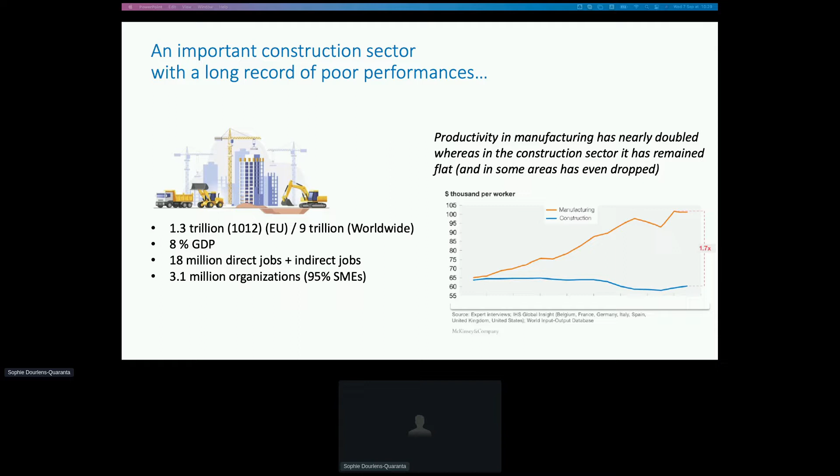For instance, the McKinsey report states that in the last decade, productivity in manufacturing has nearly doubled, whereas in the construction sector it remained the same, and in some areas even dropped, which is a big problem, right?

But it's not only about productivity. I'm going to stand up, much more comfortable. So, but it's not only about productivity, right?

If you consider that the built environment is the space where people live, recreate, and work, it means it strongly affects environmental, economic, and strategic development as a whole. Therefore, it needs to be healthy, comfortable, safe, sustainable, and so on, which is a big challenge.

Another big challenge is, of course, renovation. Renovation is a major challenge because the stock of existing buildings is huge—something like 75% of the existing building stock.

This stock is basically non-efficient on the energy level, because it was built in a period where there were no energy performance requirements, right? So we have this huge stock.

The rate of renovation of the stock is very low. If you consider that we need deep renovation to improve energy efficiency by, let's say, 60% or so, we only have 0.2% of the stock renovated each year, which is very, very low.

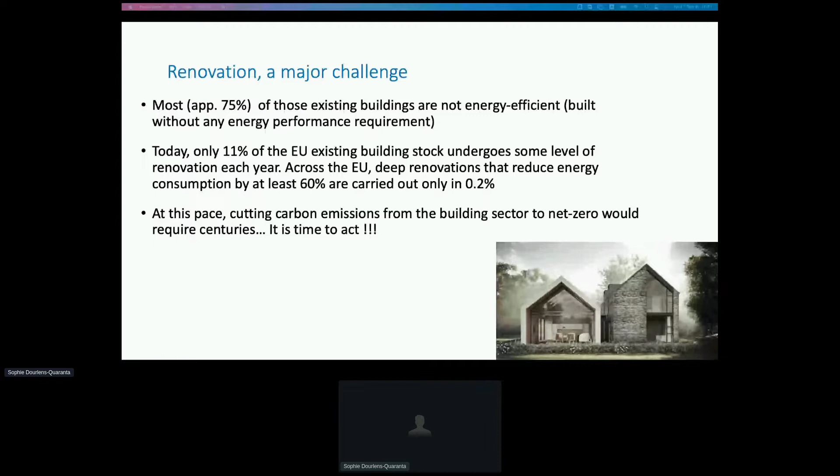This is basically what the EU is doing through the Renovation Wave strategy. This strategy was launched by the European Commission. It aims at doubling the rate of renovations and modernizing the existing stock, and also at contributing to the green and digital transition in Europe.

There are 3 actions mentioned in this strategy that you will obviously be interested in: digital building logbooks, building permits, and also BIM for public procurement. I will go back to these items as I go.

In that context, the EU BIM Task Group addresses some of these issues. So what is this group? It is a European platform composed of public procurers and policymakers, aiming to bring collective expertise to improve BIM deployment in European countries. This is a major issue for us.

I chose here a photo with Richard Petrie, late Richard Petrie, a member of the group, as a tribute to my friend Richard, who passed away a few months ago.

Obviously, we want to share common best practices between European countries. Some countries are more advanced than others, so how do we share these best practices? How do we make it possible for European countries to improve their BIM journey? A major point is that we need to bridge the gap between the demand side on one hand and the supply side on the other.

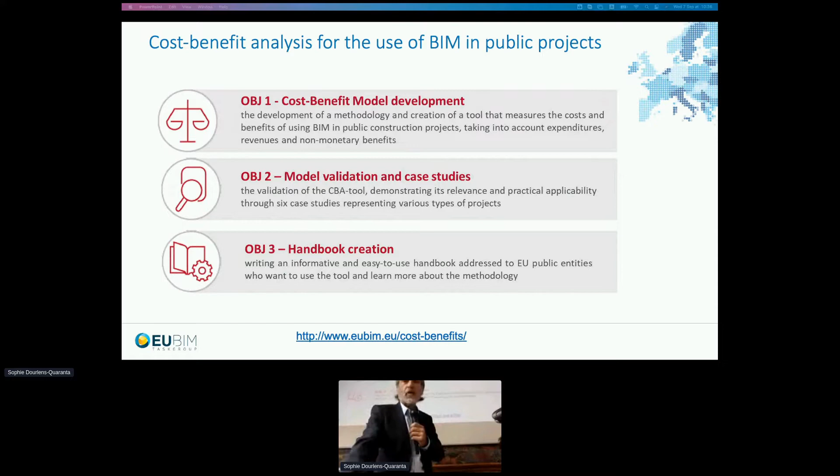The case studies we used to validate the model are very different, obviously, because we needed to make sure we cover the whole spectrum. We have case studies coming from various countries in Europe. We have projects of buildings, projects of infrastructures. We have various types of budget, important budget, but also small budgets. And obviously we cover all the phases - design, but also renovation. So it covers all these activities.

Again, all this material is also available on the website, so please go ahead and check it.

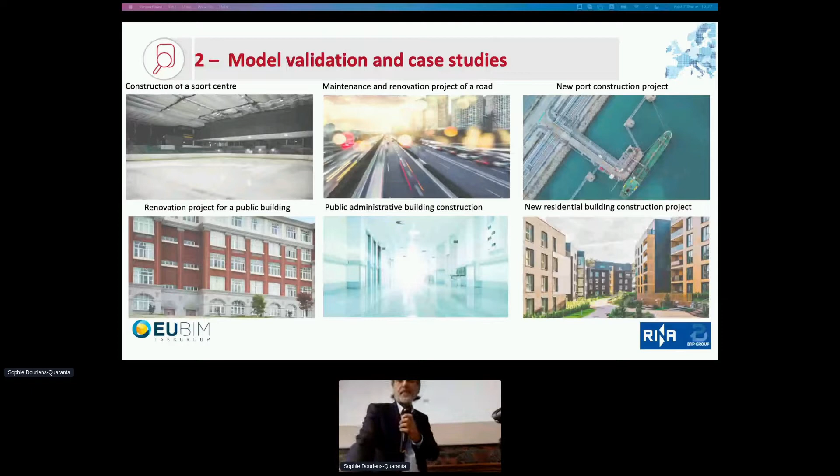And the action we finally worked on is a white paper that we prepared for the European Commission. You probably know the European Commission has a public procurement directive that was published in 2014. This directive was not very ambitious on the BIM level. It only said that procurers are encouraged, or the use of BIM for public procurement is suggested.

So the European Commission is now working on a new directive, and we are pushing for the new directive to be more ambitious on the BIM level, and we are providing the European Commission with some information to back this argument. In the white paper, we underline the importance of

using public money and making sure that you can use public money in the right sense. And to do so, we underline the importance of using open standards, because open standards allow, in fact, to make sure that public procurers are not stuck with one vendor or one solution.

So finally, I just want to draw your attention to the work going on at the high-level construction forum. It is, I think, a very interesting forum that aims to initiate the cooperation process of transition pathway between green, digital, and resilient transitions. This is done under the invitation coming from the EU Commission. About more than 200 representatives are attending these forums from different countries, coming from the private sector, the public sector, and all kinds of stakeholders, with very different sessions organized.

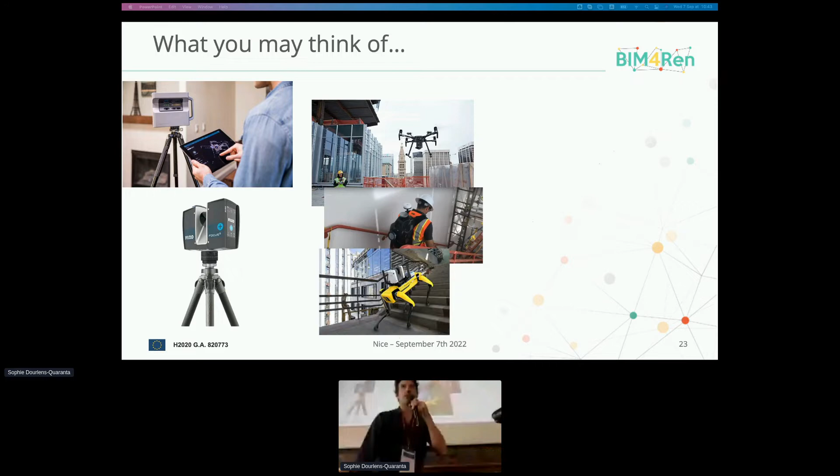When we speak about digitalization, what you may think of initially, or if you go to Google and search for digitalizing existing buildings, what you will probably find first is this kind of thing: laser scanners and LiDARs, and these kinds of cameras where you can collect a lot of data in an existing building. Technologies are evolving, we have different shapes now for these technologies. Drones are now used to collect information on the envelope of the building. You can see also some people with some bags who travel through the building collecting data with these kinds of devices as well. And now we also have robots that can be used to do so. This is really nice, and it's like wow, high tech, right?

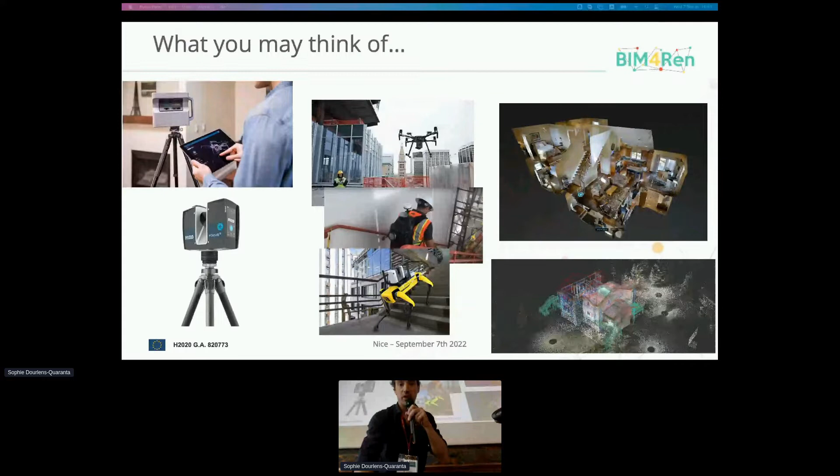And what does this produce? Once you've collected the data, you have some massive files that you need to process - you have hundreds of pictures of one flat, and you can recreate the environment, or you can have point clouds, millions of points representing the geometrical building and its different parts and so on. Okay, so you've done that, you're happy, you've used the laser technology, but now what can you do with that? So you have a renovation project, and what can you do with this data?

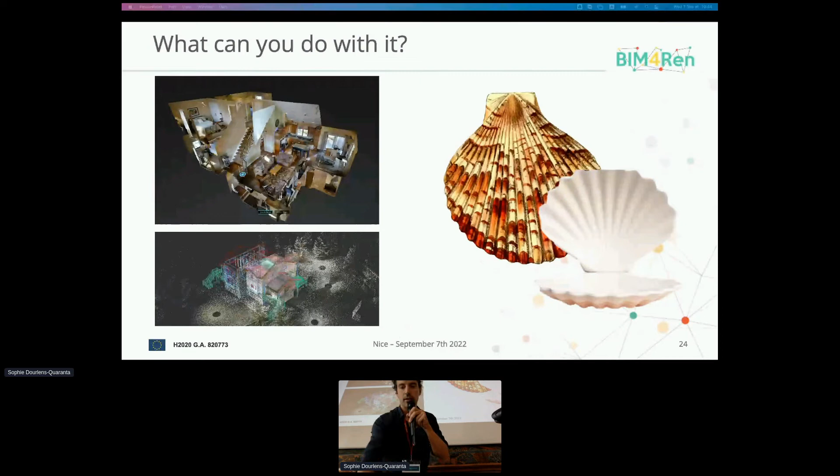In my opinion, and that's the approach we took in the different projects, this is nice, but it's empty, right? It's like an empty shell. You have a lot of data, but you cannot do much with that. Perhaps this kind of data is more useful for your renovation project - perhaps an Excel file with a quantity takeoff of your building. This is more useful to people who need to install new equipment in your building, because they have the exact quantities and so on. They don't have to look at the point clouds and so on. So perhaps this is really much more useful.

Or if you want to have some information about the status of your building, an energy audit is more useful. So the idea is that when you start with digitalization and BIM, you really have to look at your needs. And BIM is not 3D.

I think it's now more well known that you need to attach more importance to the data that you want to be part of your model. Yeah, the value of BIM is in the data. And so our approach is that BIM is methodologies, not just digital tools.

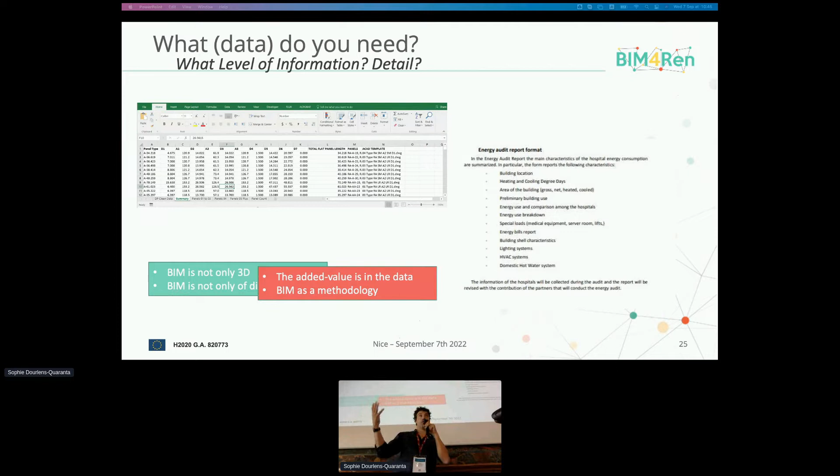Part of this methodology is also to try to identify exactly what are your needs and what kind of model you want to build up for your renovation project. So let's start to draw a workflow for a typical energy renovation project.

As a first step, we want to define the data that we need. In this kind of scenario, we know more or less what we want to change in the building. We know that it's about ventilation, about HVAC systems, the openings, and that's what we want to modify in an existing building.

So what do we want to do when we start our goals for this renovation project? We want to guarantee the energy performance of the renovation. So we need to be strong at that, to ensure customers about the energy reduction that we can ensure to him.

What is perhaps even more important to him is the cost of the renovation. This is crucial, of course. If you want to go further, you can potentially also import on the carbon impact and estimate the reusability of some materials that you will remove in the building during the renovation, and so on.

So you can have different actions that you want to perform in the renovation project, or different goals that you want to reach. How will we do that?

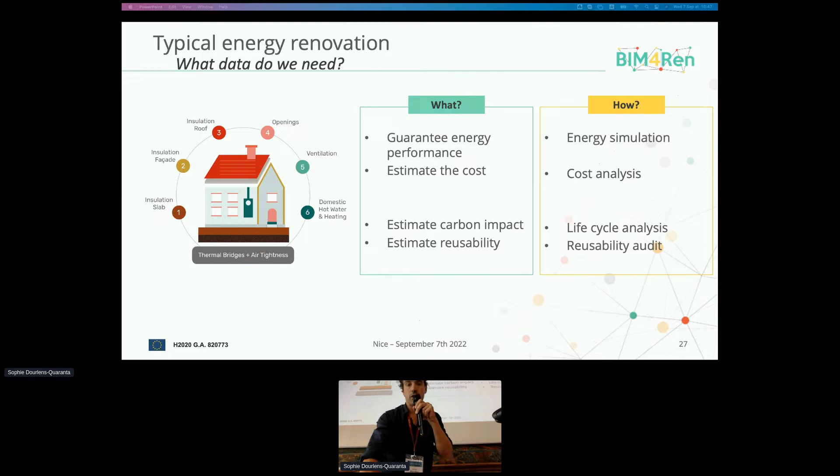Once you have answered those questions of what are the data that you need or that you will generate during this process - for the energy simulation, you need some data on the envelope, data like the thickness of the insulation, the kind of material, resistance that is embedded, the type of glazing on the building.

So you can list all the information on cost - the cost of the materials, the bill of quantities, the cost of manpower, incentives, the return on investment, and so on. So you can list all the data that you will need to perform the different actions, the different goals that you have in your project.

Once you've listed all this data, what you need to do is map it into a schema, to know exactly where you will put all this data in your model - or perhaps, will you put all this data in your model? Manpower, cost of manpower - I don't know if that will be part of your model, but you will need that at some point.

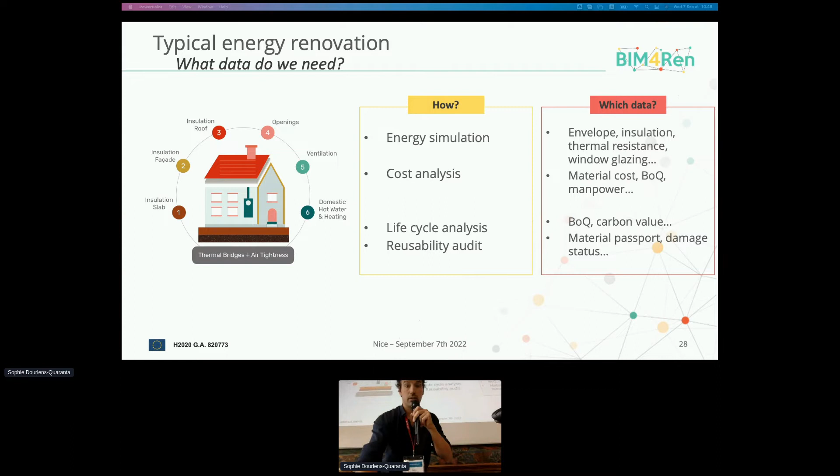So we need to transform all of this data into some BIM data as much as possible. Then the second step, once you have identified all the data that you need, is to pick up, to choose the right tools that you need to create your model.

So if you need the geometry, for instance, we've seen already that you can use some laser scanning. But if you want to create your 3D model out of it, it can take quite some time, because you need to clean up the point clouds and rebuild the 3D BIM geometry.

It's really quick. You can also use some GIS data. This would be important to get an idea of the different shadowing that the building will have, impacting its energy performance.

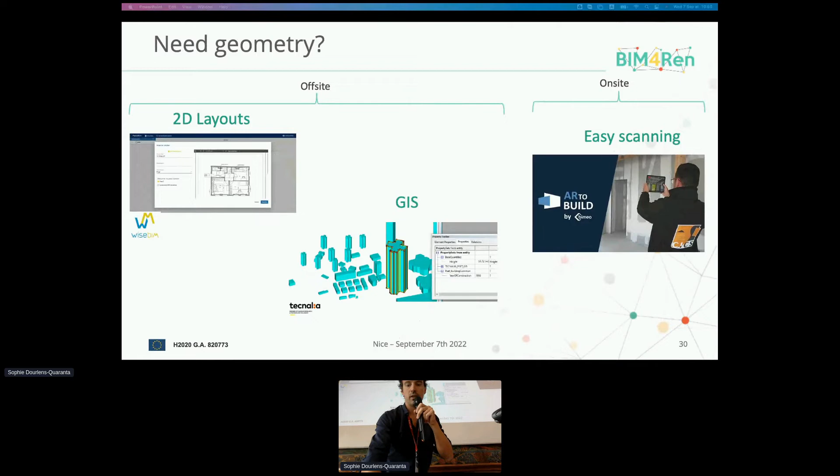And still, if you need to go on site, perhaps you don't need to have this big laser scanner. Nowadays, you have like iPads or other mobile devices with a LiDAR camera, and different apps are being developed using these cameras to do some fast scanning with your day-to-day smart device.

So we have created initial geometry, and then we need to fill that geometry with technical information. If we consider an existing building, we have two versions, on-site and off-site. Off-site, if you have technical documents about elements already installed in your building, you can scan those documents and extract the technical information. If you don't have those, you can use a smartphone, go on-site, perform the audit, and take reference of the different products installed, damages, etc. Then go back to the office, take the technical information, and put it into your BIM model.

So now you create your BIM model for this building, and for typical renovation, what you want to do is estimate different renovation scenarios. What's been done is a platform where you can click on the different items you want to change in a renovation, perhaps the windows, and connect to a catalog of products, and import all the technical information into your new model, creating a new model for the building to be renovated. Then you can estimate energy performance with energy simulation and so on.

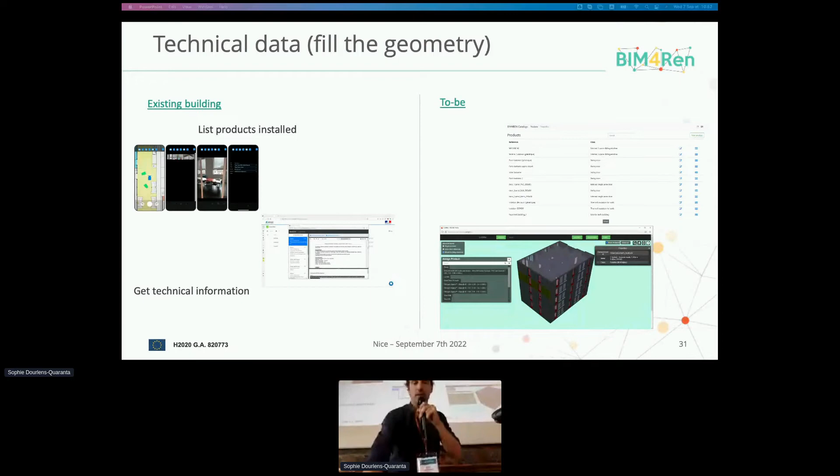I'm not entering those details, as I'm focusing on the digitalization part. So, my conclusions on this topic of digitalization.

For the users, it's really important to identify the needs for every project they're working on. Perhaps every project is different, so every model you create is different, but you need to correctly identify the data that's useful for you in your project. Then you need to choose wisely, because if you create big models with a lot of data and you don't need like 90% of it, the model becomes chaotic, hard to open, hard to work with—you're missing the point. I believe there are a lot of tools being developed, so the selection of tools isn't that easy. You need a correct state of the art of the different systems.

For the developers, it's important to listen to client needs, because sometimes we're in some high-tech process and we want to build nice software that does many things, but what clients and customers need in general is something really simple. So create software that's simple to use, perhaps performing something really specific, like the 2D to 3D recreation we saw before. That's what customers want and need. And then ensure interoperability with other software that does other specific things.

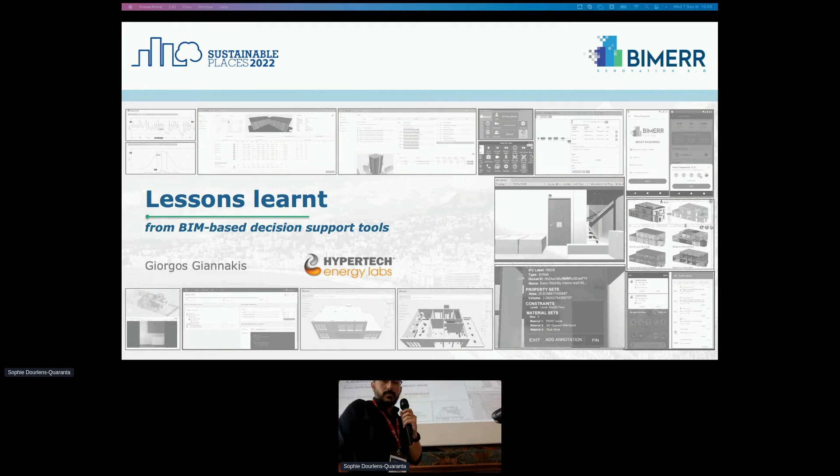But what are the lessons learned from the implementation and demonstration of such tools in actual, real-life renovation projects? The lessons learned vary—there are many, and I could not cover all of them in a 10-minute presentation. What I'd like to do in the next 8 minutes is provide some highlights about specific tools involved in the 3 different phases of a renovation project.

Lessons learned highlights with regards to tools demonstrated in those phases, starting with the data collection process, and the collection of static data, referring to BIM model population and generation. Tools involved here are scan-to-BIM, to semi-automate the process of transforming point cloud data acquired by laser scanners into BIM files, where our focus is on open BIM files, and more specifically on IFC.

Then how do we enhance and enrich the result of scan-to-BIM, the automated scan-to-BIM process, with augmented reality, using the BIM as input, trying to enrich this geometry with, for example, material properties, HVAC systems, and other information. But more importantly, how we manage this information. We create a BIM model, but at the end we need to know how we manage this information, how we access it, how we make it available to others. For this specific task, I'm referring to building information modeling data management platforms.

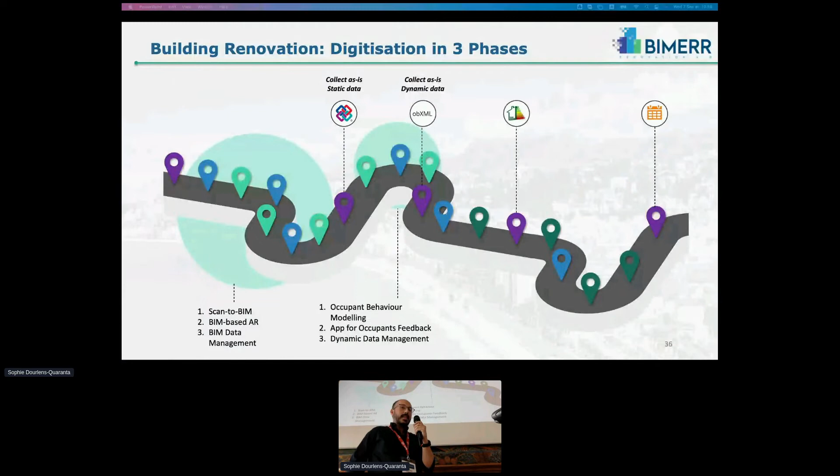Going beyond the static data, but again in the data collection phase of a renovation project, let's talk a bit about the dynamic data. I'm referring to all the scheduling information required, the profile information of the usage of systems, that is required to run simulations and reduce the gap between simulated and measured building performance.

Here, tools that are involved are machine learning algorithms applied on IoT data collected from the field on site. Based on that, we try to learn how occupants use the HVAC systems and energy systems in general.

Other digital tools involved in this collection process are apps for occupants. We engage the occupants from the very first stage of the data collection, and what is really important is to learn from them what are the weak points of the buildings. They live in the buildings, they know what the weak points are, so this information should be utilized to improve the measures, the renovation measures, that we are going to apply on the building.

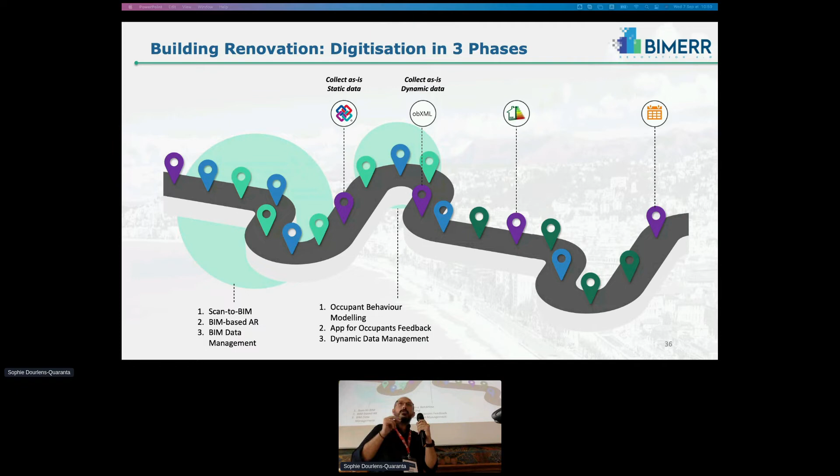Again, all information should somehow be manageable and interoperable. We collect all these, for example, behavior data models, and we need to make them interoperable and link them with the BIM information that was captured in the previous phase.

Next phase, the design phase of a renovation project. Here we're talking about performing the energy audit, evaluating the as-is status of the building, what's the baseline, and based on that, providing some renovation scenarios, a combination of renovation measures, evaluating them, calculating specific KPIs, and selecting the renovation measures that meet the user's targets.

So here, tools that are involved utilize the as-is static and dynamic data and automatically transform this information into building performance simulation models that could be utilized without any manual edit by the user.

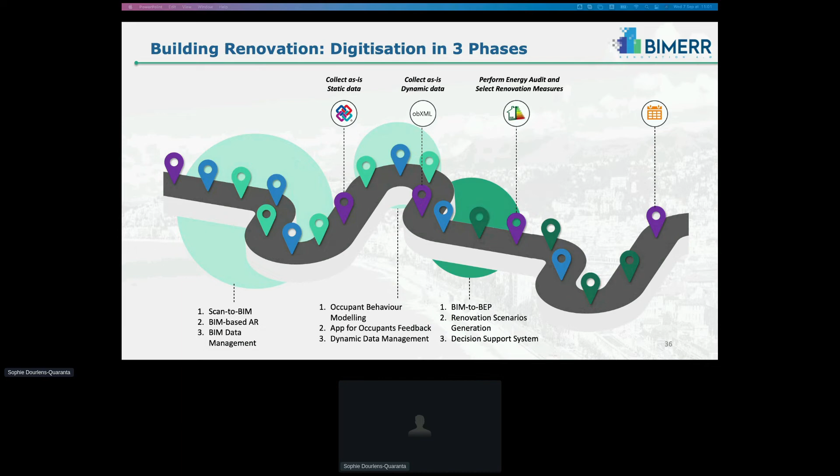Other tools involved in this process are renovation scenario generator tools, where we utilize a state-of-the-art material and component database to automatically generate candidate scenarios that could be applied on the building, evaluate their performance, and allow, through a decision support system, the user to select which measure meets his requirements.

Last but not least, the construction phase, where we're talking about applying the renovation measures selected in the previous phase in reality. Here, tools that could be involved, and that we actually developed and demonstrated in BIMERR, are tools for process modeling and simulation, to simulate different combinations of tasks that need to run in the actual renovation project.

Based on that, we estimate time and cost KPIs of the whole process. Workflow management and monitoring tools are applied to monitor and track the progress of the renovation project. And finally, apps for workers and residents support them, alerting them, for example, to different safety issues, notifying them about activities that will run close to their apartments, and so on.

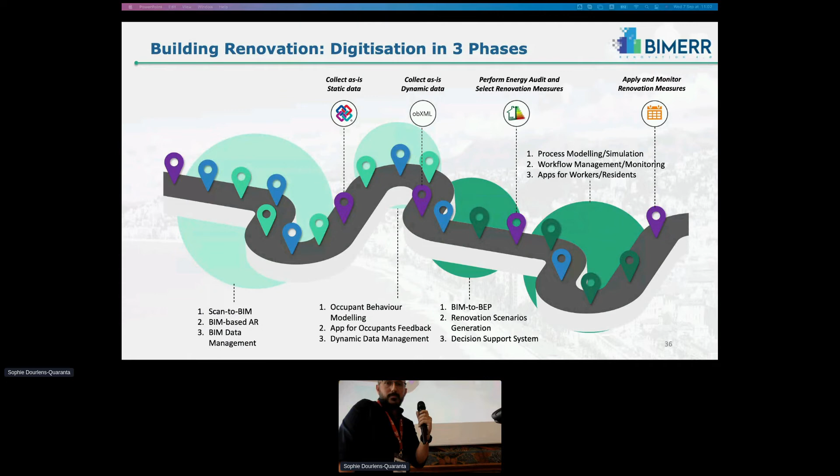So, moving to the lessons learned, starting with the data collection phase, with regards to scan-to-BIM, I would like to present the lessons learned from the developers' and the end users' perspective.

So the lessons we learned when we demonstrated scan-to-BIM as a tool in our pilot sites is that low quality of the input data we're collecting significantly affects the results of the scan-to-BIM automated process and the generation of the BIM model for sure. This is not a surprise - we know that the input data affects the result of a process.

The lesson learned from this specific tool is that the end users, the developers, learned that training of the people that perform the laser scanning is a prerequisite to have high quality of data that are collected.

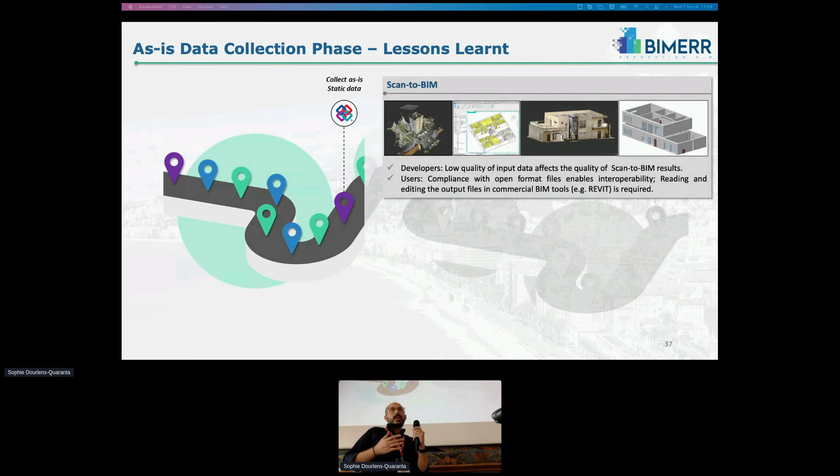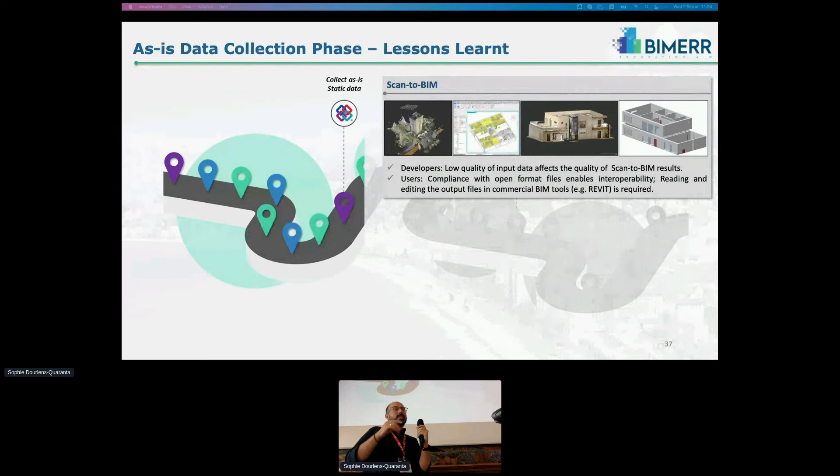From the user's perspective, referring mostly to BIM modelers, we learned that it is really important to be compliant with standards and open BIM format files, because this way we enable true interoperability between different tools and stakeholders, and also prevent vendor lock-in.

Moving to BIM enhancement with augmented reality, within BIMERR the AR application was developed to run on HoloLens. The lesson we learned is that it would make sense to focus on mobile apps instead of HoloLens, because the high cost of procuring such devices could limit the replication of the tools in other demonstration sites and renovation projects.

From the developer side, we learned that real-time editing of IFC files to enrich the IFC file on site is quite challenging, because the files are heavy, and running such heavy files on HoloLens with low capacity could make the whole process quite difficult.

Moving to the BIM platform, within BIMERR we also developed a tool that maps information with regards to BIM. The lessons learned from the demonstration and validation of this tool is that preparing an error-free BIM model that meets the requirements of building performance simulation and other tools involved in a renovation study is quite difficult.

To enable the evaluation of candidate renovation measures, it is really important to have a quite rich materials and components database that allows you to extract and combine information, and based on the baseline as-is information, propose renovation measures that could be applied on the building.

The feedback from the users is that the utilization of a decision support system that allows you to evaluate different renovation paths, active renovation measures, in terms of specific KPIs and provide recommendations, has great commercial potential.

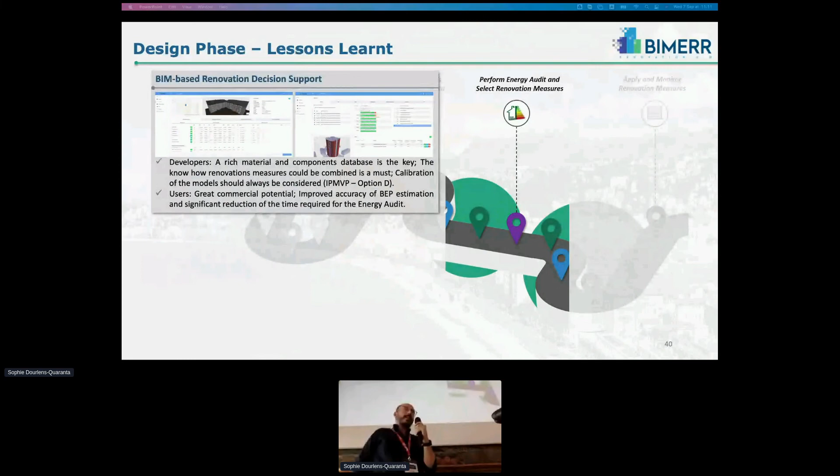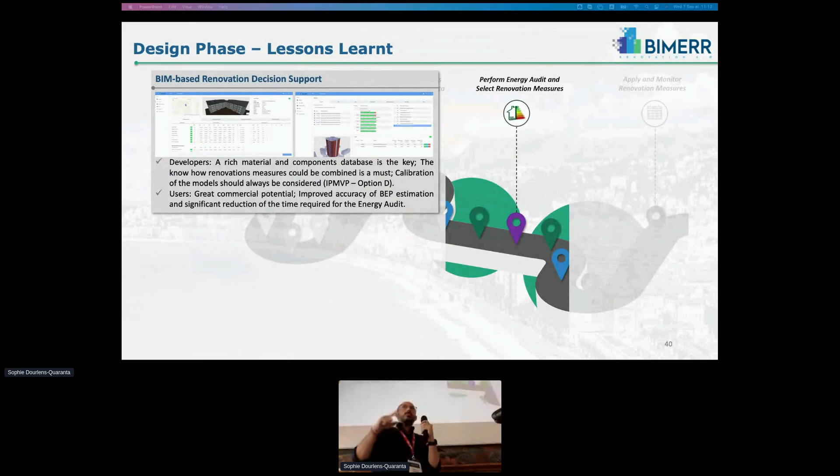Another point that was quite clear from the user feedback is that calibration of the models resulting from the automated process that translates BIM information to building performance simulation is of paramount importance, because this is the only way to reduce the gap between simulated and measured accuracy, and to recommend renovation measures that could provide the expected results with regards to energy efficiency for the specific renovation project.

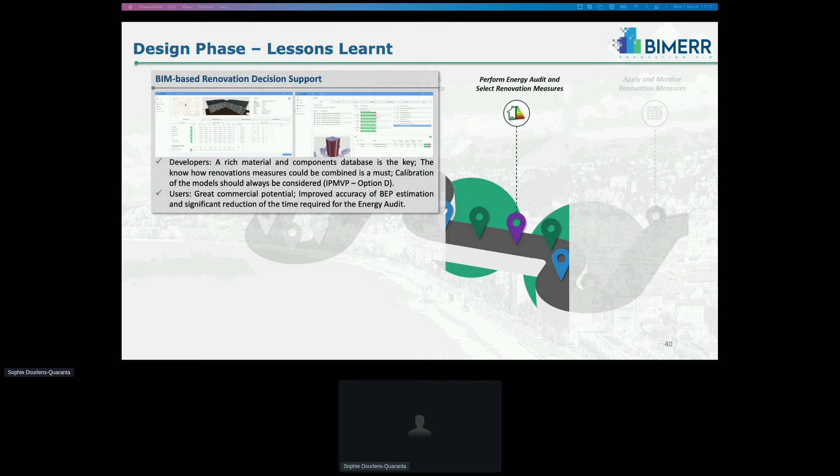Part of the renovation support system is the BIM performance simulation. This is actually the most important component of the decision support system because it's the most complex one, as it translates automatically the BIM data and occupant behavior data into building performance simulation, invoking robust simulation engines like Energy Plus, and provides feedback to the user with regards to energy KPIs.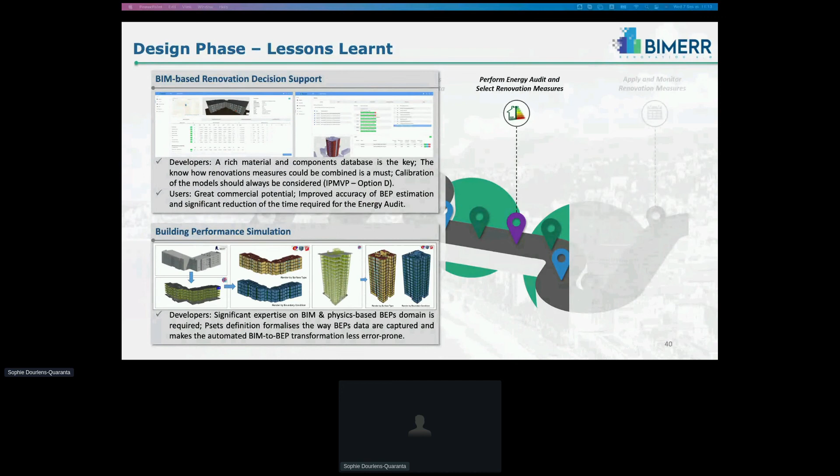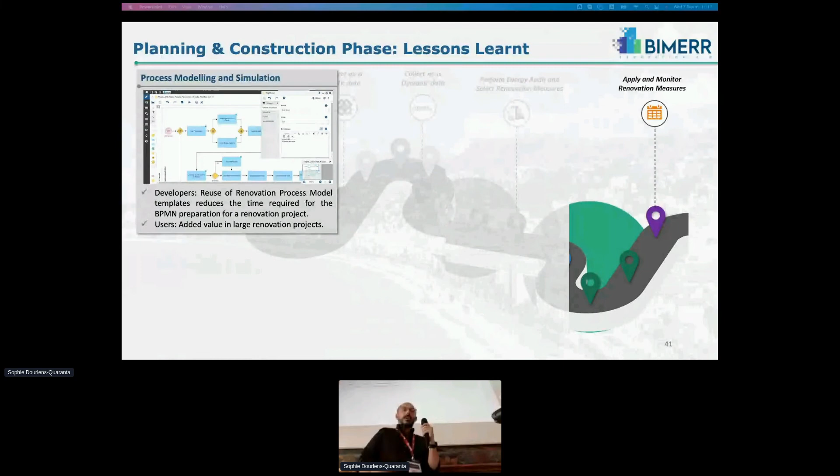And this is my last slide with regards to the construction phase, where we're talking about tools for process modeling and simulation, workflow management and monitoring, but also workers and residents support. The lesson learned from this tools demonstration is that for small to medium scale buildings, the added value of

components that digitize the process modeling, the workflow management, and monitoring is not quite appealing. They don't want to replace the end users' current practice that they follow to monitor, track, and plan the activities on site. But from this specific

phase of the renovation project, we learned that the apps for workers and residents provide benefits for them. For example, the fact that they could learn and know when specific renovation works are taking place in their apartments was of paramount importance to schedule their activities, but also providing some support material to the workers through the apps on how to run specific courses is also a lesson learned and another value to the end users of the renovation project.

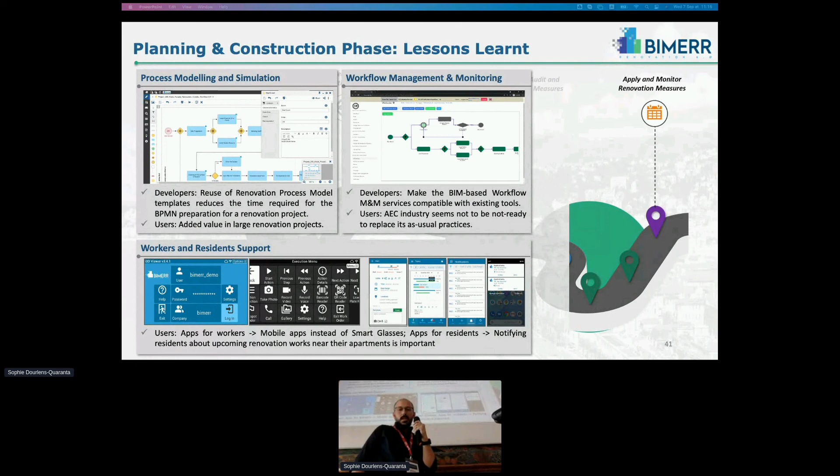So that was my last slide on the presentation. Thank you.